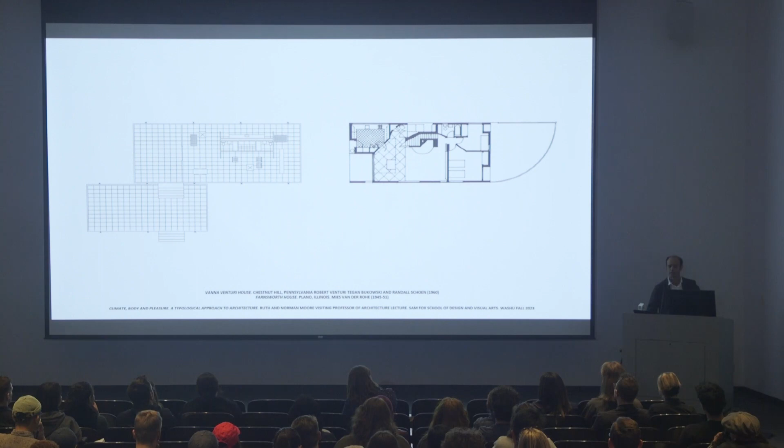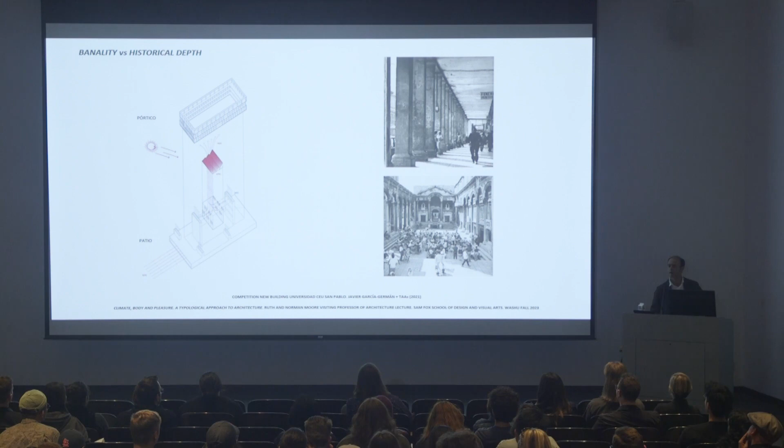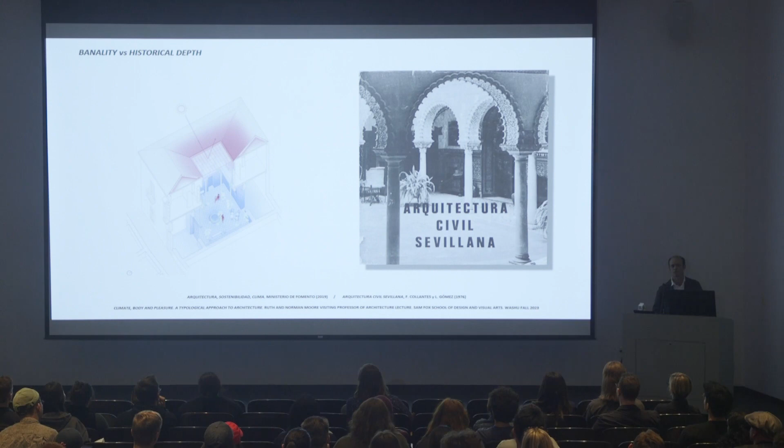This interest in generic models and archetypical forms has led me to the idea of typology. That is a kind of old idea. It has become a recurring reference in my work. Beyond the formal interest of the tendenza of Rossi, Krier, and Moneo, or the iconographic turn of Venturi, I'm interested in a renewed idea of typology, which complements its formal dimension with an interest in its performance, not only its climatic performance, but also the experience of the people who live within.

However, I think that unlike positions like that of Anna Heringer, who rely on traditional tectonics that can hardly face the challenges of the 21st century, or against the uncritical commitment to cross-laminated wood as if it were a kind of new concrete, I advocate for the recovery of both ancestral and modern building techniques, from rammed earth to prefab concrete, as long as they have local material supply and can be industrially systematized in order to decarbonize architecture.

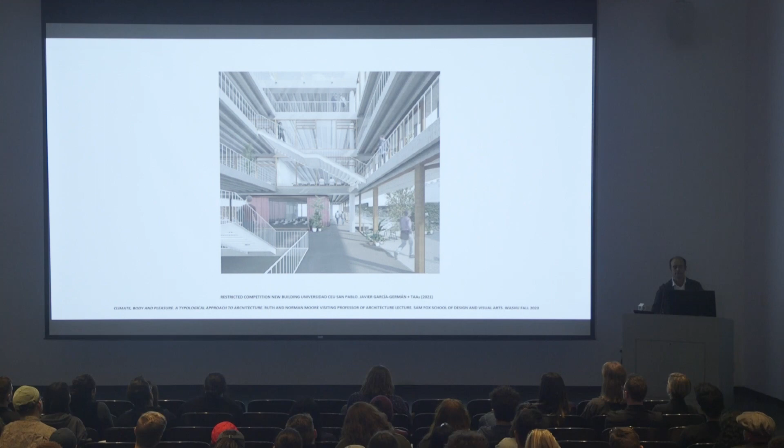Renouncing both activism and historicism, I'm interested in a revisionist attitude towards architecture with an inclination for materiality and experience. On the other hand, renouncing populist positions, I'm interested in a technocritical and cosmopolitan attitude with an inclination for the human body and its metabolism.

In the face of globalization and its tendency to make everything homogeneous, and as a reaction to regionalism that is kind of exploding the universal, I would like to think I advocate for what I call a generic specific, a position that is capable of articulating cosmopolitan dynamics with local contingencies, the universal with the singular.

Okay, let's go to part two. I will show several projects. I will try to show with these five projects how my position's architectural agenda has evolved in the last years. All of them are competitions. Some of them were successful, and we managed to build the projects. There's also a house I built several years ago. The selection might be better or worse, but I think it's the most pedagogical because I will try to show the evolution of interests I have pointed out in part one.

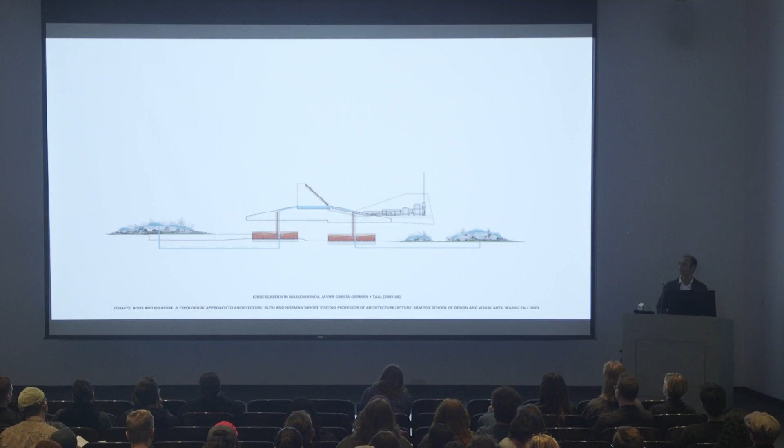And it also had this technical roof, which provided all the elements that the floor needed. Provided light, water, and energy, activating them for the use of the children, for the learning environment. The interior space was paved with sports flooring, kind of soft tiling, which was heated with radiant floors. You can also see in this picture how this roof provided the light to the interior spaces, generating this kind of interaction, common spaces between the rooms, the classrooms. It provided this soft and continuous warm environment where kids could crawl.

From the inside to the outside, the exterior floors included, around the building, a first ring of sandpits where the kids could play, and next, Jardin en Mouvement, inspired in the work of French gardener Gilles Clément, kind of gardening movement, which changed with the seasons, right, openly, freely, and where children could learn the passage of the seasons.

These floors, both interior and exterior, were activated from the roof, where the rainwater was collected to irrigate the garden, where the solar radiation was also accumulated to heat up the interior floor. On top of those skylights, we placed thermal panels, which heated up the water that went to the radiant system under the pavement.

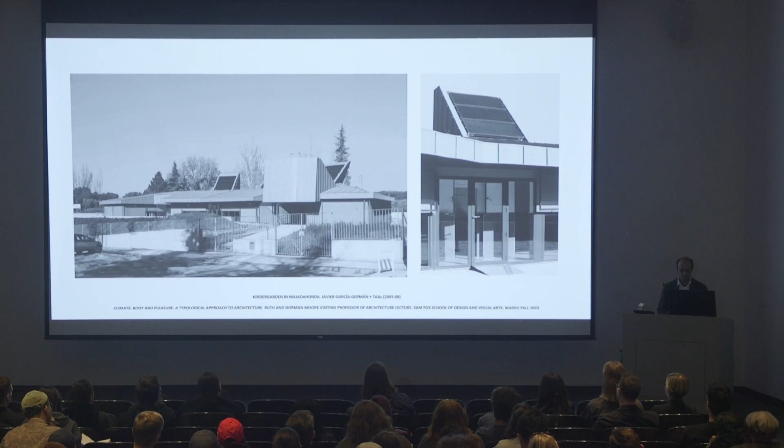In these beginnings, I think that climate was explored adding more or less technological devices, like the thermal panels in the skylights, but it is not a part of the spatial and material conceptualization of the school. This will only be approached in subsequent projects, and I will try to show you the changes. The building was wrapped in a net supporting an ivy creeper, which now covers the entire kindergarten, mediating between the building and the surrounding garden.

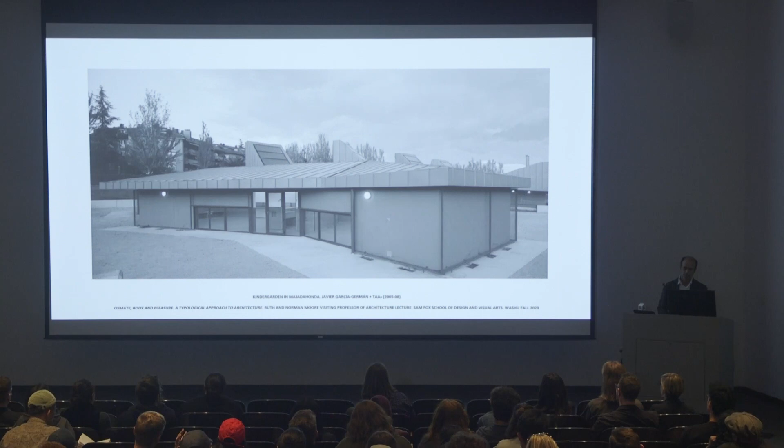This project was developed with a lot of precision, okay? And I will try to show you how it was achieved. Almost all the elements in the building were under control. We knew the climatic effect of all the elements that were introduced into the project. Of course, this project is connected to my doctoral dissertation I was preparing at that time, and also to the book Thermodynamic Interactions. The project starts from these facts, crude facts.

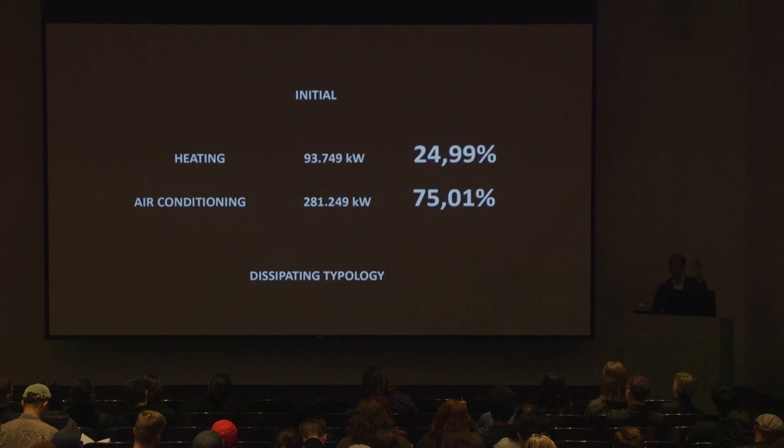In Madrid, any office building is a dissipative typology. And this means that it is continuously generating heat. I mean, Madrid does not have a climate as cold as Saint Louis has. And if you analyze its energy consumption, an office building in Madrid requires air conditioning throughout the year, except for the coolest winter months, when it needs a bit of heating. This implied that architectural strategies should go at least in two directions.

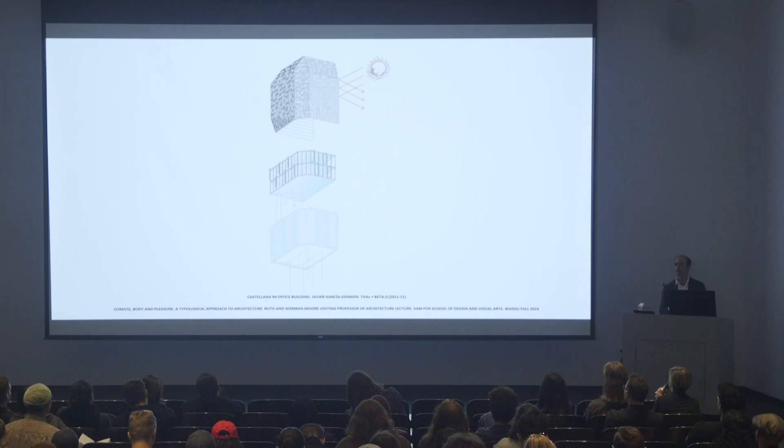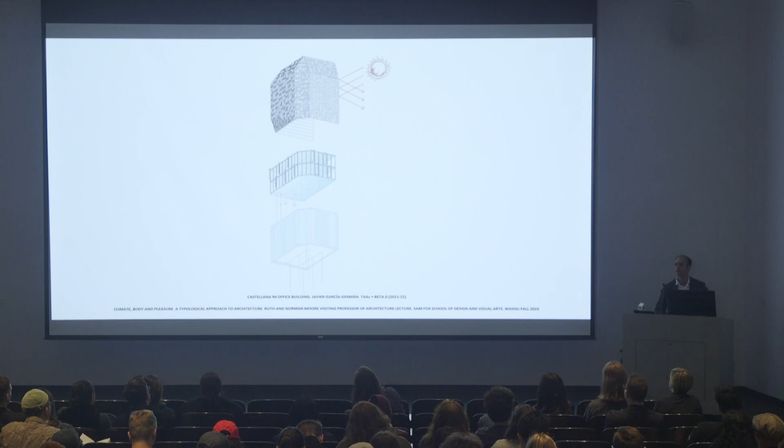On the one hand, the building should go down to capture the cool underground, the cool temperatures that are lying under the site. And on the other hand, the building should provide a solar shield. One of the requisites of the developers was to have a glass building, okay? So we needed to have a really good protective shield for the sun. For the first strategy, very radical steps were taken.

Ducts were embedded in the 2-meter thick foundation slab the building has, almost 20 meters below the ground, and in the 40-meter deep diaphragm retention walls around the parking, which together with 15 geothermal wells, which run 300 meters deep, capture the underground cool temperature below the site. These low temperatures are then pumped back to the building, to the slabs, where a radiant system embedded in the concrete slabs cools down the users inside the building.

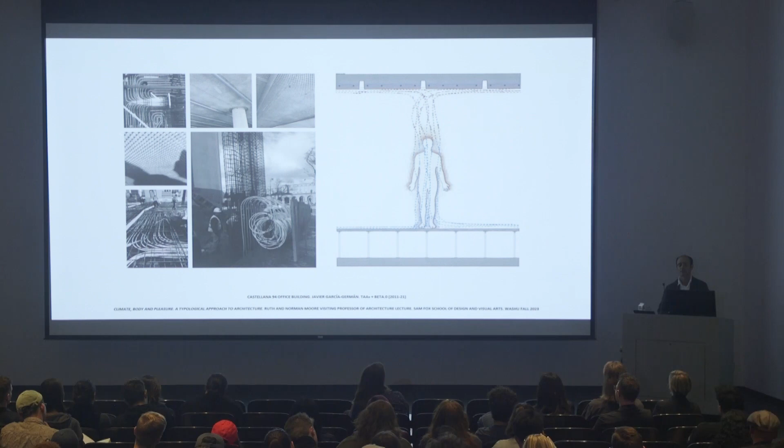The result is a commercial office building without false ceilings. Flexibility is provided by a raised floor. In this building, the structural and climatic dimensions are integrated into, I would say, a convergent strategy that is conflating the structure and climatic questions. The corrugation of the slab you see in the picture aims to maximize the radiant heat exchanges between the building and its users.

It is important to point out that the building energy saving strategy takes on board how the body works. You know that the body is a heat machine that is exchanging almost 50% of the heat it gives off through radiation. It, however, exchanges only 25% through convection, which is the heat transfer mode air conditioning uses. Cooling with radiant slabs, compared to the typical air conditioning system used in office buildings, results in incredible energy savings, since the human body is much more efficient at exchanging heat through radiation than by convection.

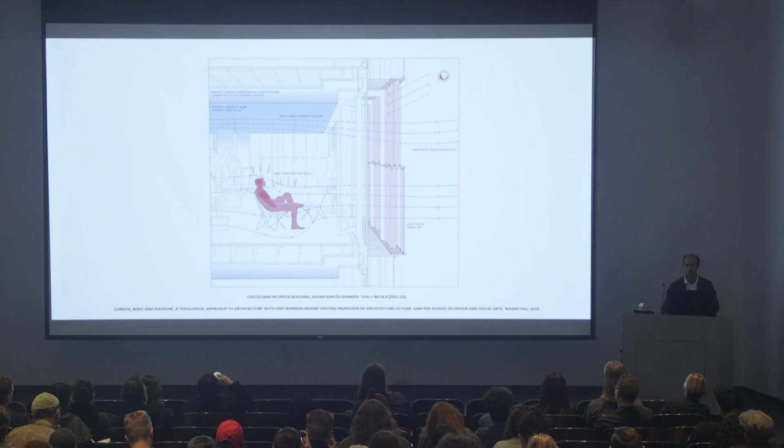So looking at the human body, we managed to reduce substantially their energy budget to the point of not having any air conditioning. And Madrid in summertime can be really hot. The second strategy was to design an effective solar protection shield. First, this has to do with the building's massing. Urban regulations imposed a step volume for the office. It's the step volume you can see under the glass envelope.

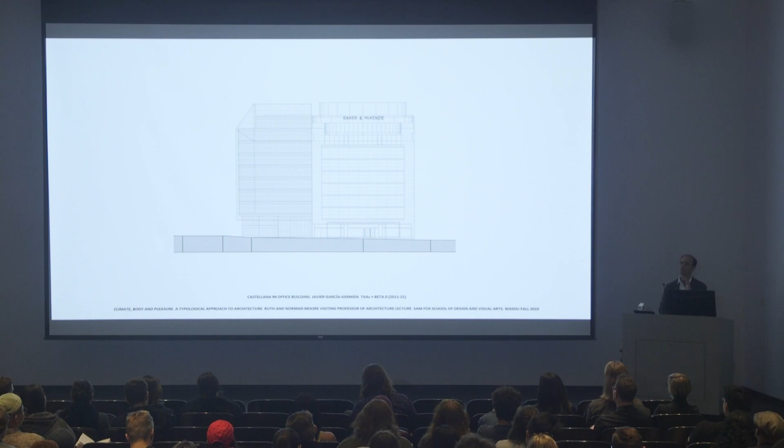This volume, wrapped with a faceted skin, increased the capacity of the building envelope, and we managed, through the shape of the envelope, to reduce the impinging solar radiation by about 10%. So through the geometry of the envelope, we managed to tackle again energy questions, addressing energy problems through architecture. The geometry was also complemented by a material strategy.

This faceted skin was built in a reflective glass, which through the arrangement of the different pieces and the thermodynamic properties of each of the glass tiles, protected the building from the sun in a very effective way. This material strategy was designed with parametric precision, since the position and the performance of each of the pieces of glass placed in the building was controlled through a complex Grasshopper script.

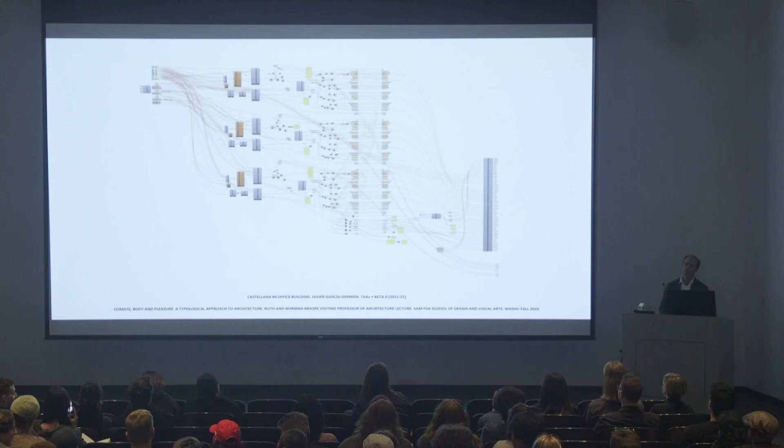And this tool, apart from providing precise quantitative data on solar protection or the energy we were saving, enabled us to interact with its boundary conditions, mediating between many parameters that were in the site, from the solar questions to the wind, to the shadow cast by surrounding buildings.

Since building solutions required systematizing to ease fabrication and assembly processes, we designed 8 different modules with particular technical and aesthetic properties, and the parametric model was very useful to arrange these 8 modules, indicating the most convenient position across the envelope. So we had some modules that were more permeable to enable natural ventilation, other modules that had more reflective qualities, which were positioned in the west facade, etc.

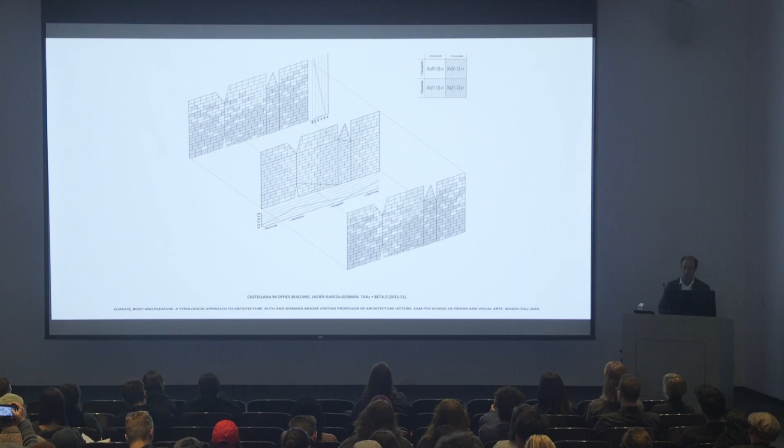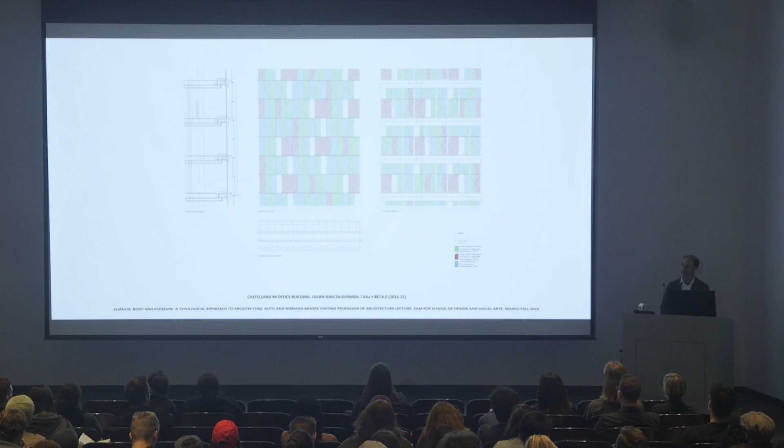It enabled us to select particular types of glasses too, the kind of glasses with the thermodynamic properties most indicated for each position. We had 4 different kinds of glasses. And also to decide the best angle in which the glass tiles were to be placed. This same logic was applied throughout the envelope, wrapping the whole building with the same skin.

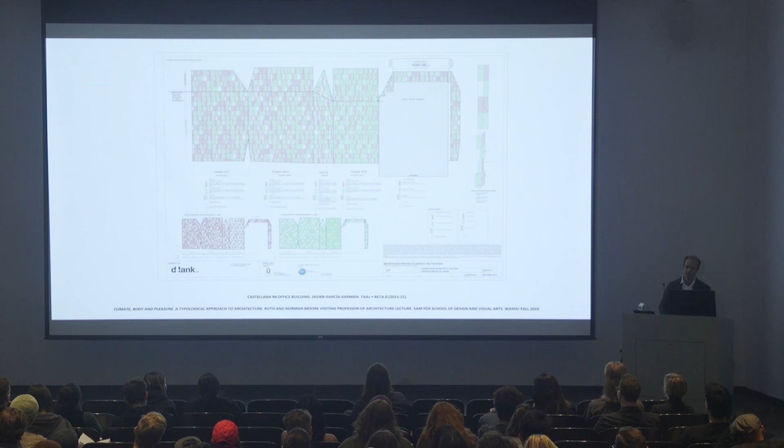Apart from this kind of energy-saving architectural process, we were also interested in the aesthetic dimension. And we looked at artists like Olafur Eliasson or the French Arnaud Lapierre. We thought that this glass skin also required a perceptual dimension. Faced with the solid materiality of the brick and stone buildings in Madrid, we thought that installations like this one seemed appropriate, dematerializing the physicality of the building, diluting its presence amidst the reflections of a cloudy sky.

We thought it was a kind of interesting strategy. Madrid is well known for the beauty of its skies. We intuited that the materiality offered by this installation would be appropriate to reflect the dynamic chromatism of Madrid's changing skies, proposing a more sensorial approach that we found could somehow balance the overly technical approach we had unfolded for the rest of the building. The skin reflects the Madrid skies in a variety of ways, depending not only on the time of the day, from sunrise to dusk, but also on the meteorology, on cloud arrangement, cloud density.

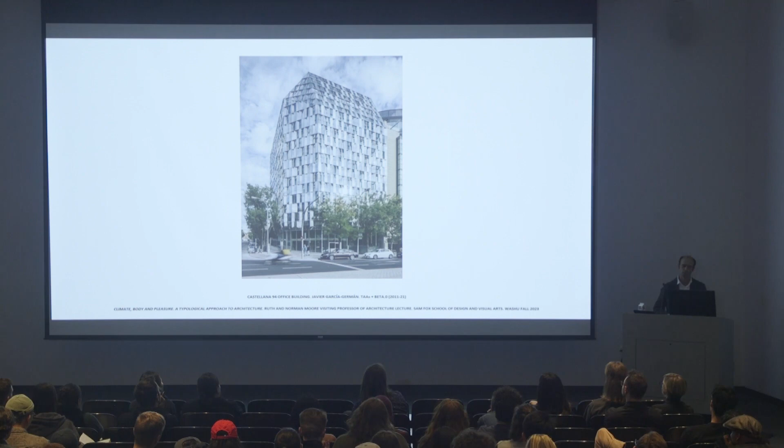The reflective skin captures the sky of Madrid, diluting it in hundreds of flashes and reflections, which are introduced to pedestrians walking along the streets. At the scale of the whole building, this faceted prism, I think, is also amplifying this effect, forming a great kaleidoscope which dematerializes the building, reflecting the beauty of the changing skies.

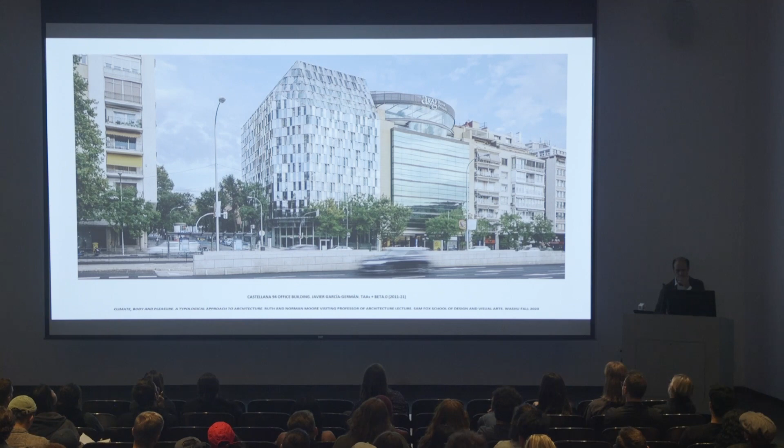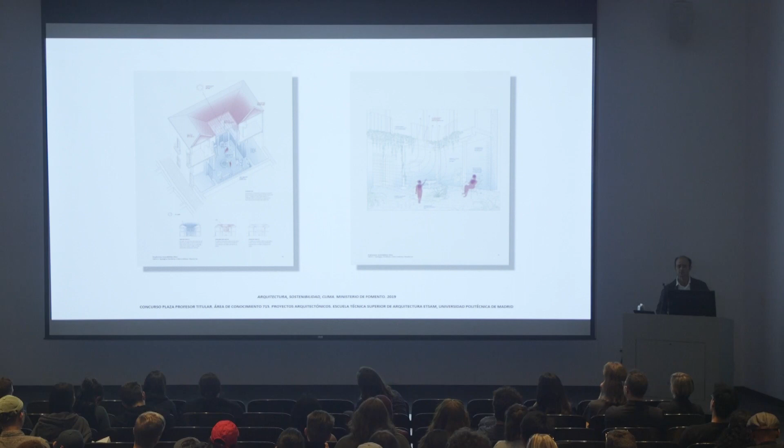Okay, let's go to the last 2 projects, which shift this quantitative approach I have shown you in the office building to a qualitative and experiential one. These 2 projects are related to the study of climatic types I have been developing in the last years. This has run in parallel to other research endeavors, principally an exploration on Spanish climatic typologies, which has been financed by the central government to find in vernacular and ordinary Spanish architecture an alternative to the more quantitatively driven energy regulations.

The first project is a single-family summer house in El Escorial, which is a town close to Madrid in the mountains. Unlike the previous project, which started with crude thermodynamic facts, this one began its design with a documentalist approach, which explored a variety of questions which range from the site's climatic conditions to the local material culture, to a set of historical references I thought were appropriate for the commission, the experience and lifestyles of the inhabitants too.

Numerous climatic types were studied, among which I would like to highlight this American wooden house with this green roof, which is included in Sybil Moholy-Nagy's book, Native Genius in Anonymous Architecture, and which my WashU students know quite well. And an interesting Russian wooden cabin, the izba, which combines the insulation of wood to the outside, as the American log cabin, with the thermal mass of that huge stone fireplace in the inside. This massive fireplace is lit in the early morning, and as the day progresses, stores heat throughout the day to progressively release it along the night to warm the inhabitants of the cabin who sleep on top of the fireplace.

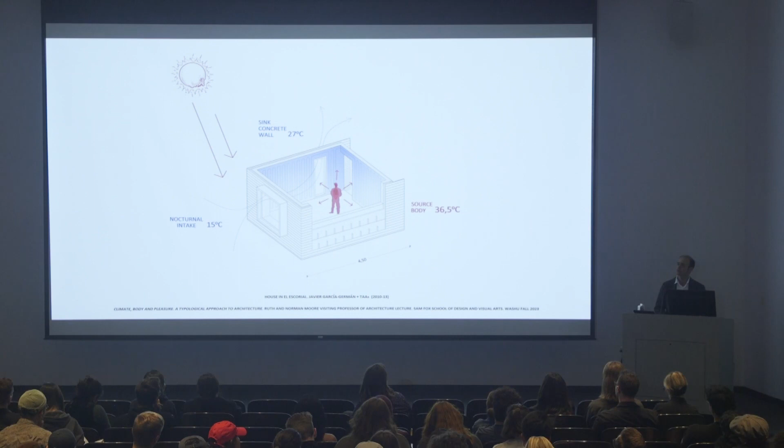The project starts by designing a typical room. It is kind of the elemental, spatial, and climatic unit of the house. And it has the capacity to articulate the main objectives of the project. It has a big window to enjoy views. The project is located in a beautiful forest. In addition, each room has an opposite window to enable cross-ventilation to cool down its interior in summertime. Like the Russian izba, the interior of the room has thermal inertia, as it is built in exposed concrete, so that it can cool down in summer and in winter. And externally, it has been insulated with projected cork and clad in wood to add an extra layer of insulation.

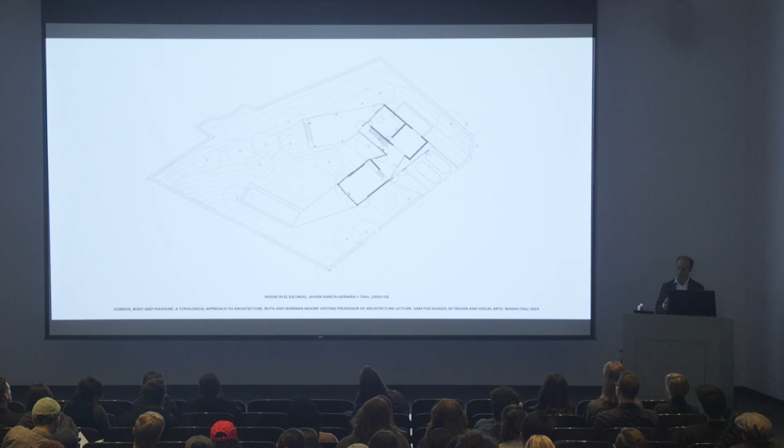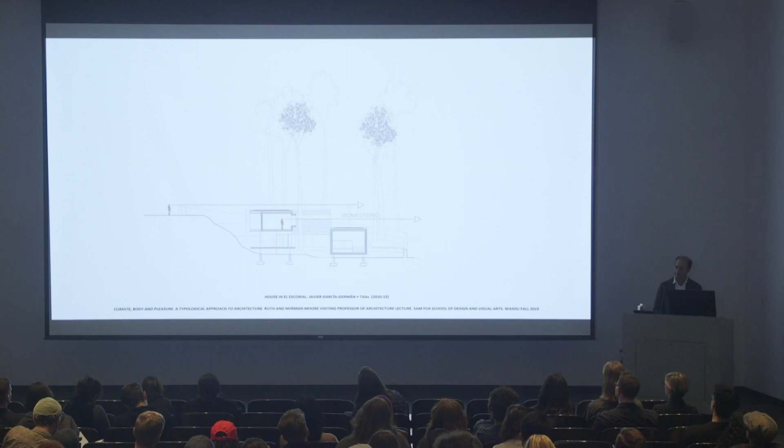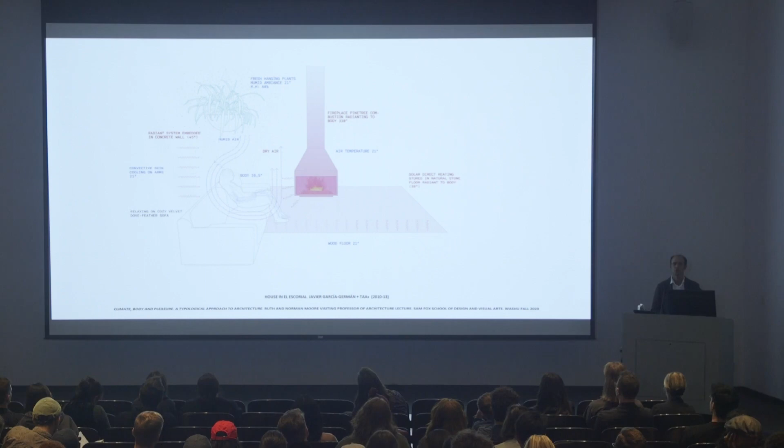On the ground floor, the shared spaces are connected to the garden, so the typical room is transformed to open to outdoor space. In section, the rooms are raised to look over the lower floor, generating a shaded porch that is connected to the garden. The interior of the house was designed to meet the wishes and also the beliefs and the ways of life of the owners, ensuring that the architectural and environmental conditions were well articulated. The interior finishes were defined according to their climatic performance. For example, terrazzo tiles were located close to the fireplace and to the south-oriented bay window for heat storage, whilst wood was used in the rest of the room.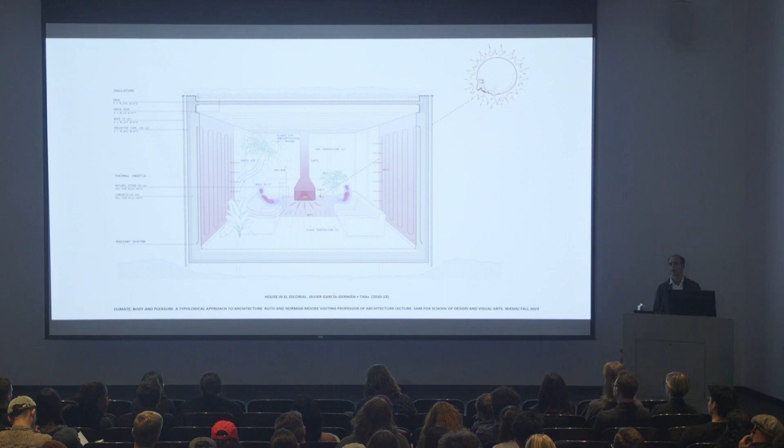And from this post-occupancy drawing, full circle, we go to the interior of the house, testing that the collection of rooms mediates between interior and exterior, between outdoor climate and indoor atmosphere to provide a well-calibrated environment. On the ground floor, the domesticity and coziness of the upper rooms dissolves to open interior space and integrate indoors with the garden.

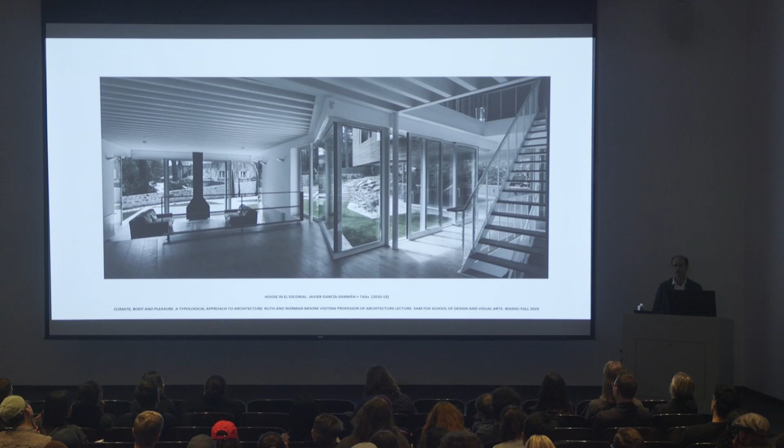The house is located in this beautiful forest with these fantastic views. Note how the rooms rise following the slope of the mountain to maximize views and to create this shaded outdoor space.

The house, similarly to Moholy-Nagy's log cabin, is covered with a green roof that has over the years grown with plants, providing this extra insulation. Cork and wood are giving to the elevations, but also integrating the house into the woods and the surrounding environment.

Okay, so we are getting closer to the end, and to finish, I would like to explain the last project, a public housing scheme we have recently completed in Madrid. Being a much larger project than the El Escorial house, however, it has been designed with the same design protocols.

It is a conventional building with simple, straightforward, ordinary architecture. It is built with prefab concrete panels, which gives it a roughness and dryness that is typical of social housing buildings. The durability of the building underpins the selection of these concrete panels as the principal building material.

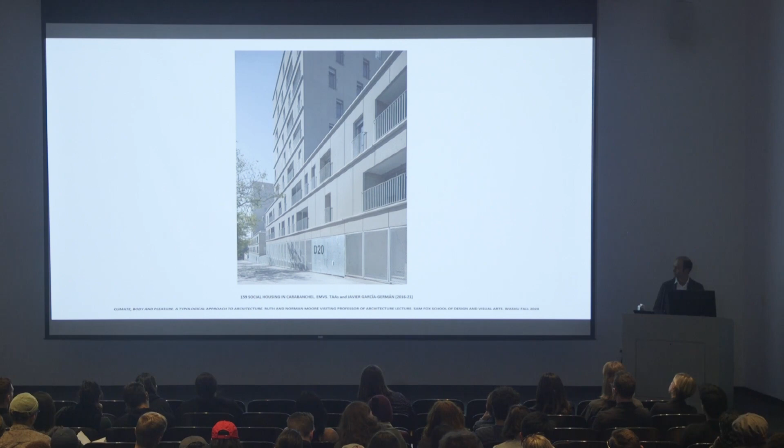These panels have this built-in fascia that is kind of marking each of the floors, but by flying slightly over the facade, as I learned from the Smithsons' Economist building in London, prevents water runoff, addressing the weathering and maintenance of the building.

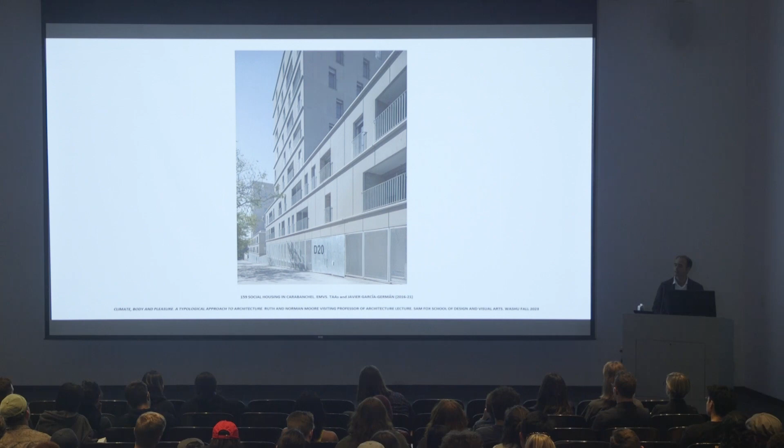These panels, which are up to 8.5 meters long, ease a lot the construction process, enabling a fast assembly line. In addition, the panels have been bolted to the slabs, which will facilitate future disassembly procedures.

Its stark and utilitarian aesthetics hides a network of interior public spaces which are passively tempered, being warmed up by the sun in winter and cooled down by summer winds, catching a smooth breeze that blows in Madrid in the early morning from the northwest from 6 a.m. to 9 a.m., and that has the capacity to make Madrid a city without air conditioning, which is something amazing.

This solution is achieved through a design process which, unlike the office building, combines technical and cultural drivers. First of all, we look for everyday life situations which are climatically and socially successful. This image shows a typical situation in Madrid, going out for night cooling, or as we commonly say, salir a tomar la fresca. We look for situations which evidence successful climatic, urban, and architectural interactions.

We also look for references in historical and contemporary architecture, like this traditional house in Cairo, studied by Hassan Fathy, or the Austrian pavilion at the Milano Expo. With these examples, we try to search for the architectural strategies which will provide the success of these situations.

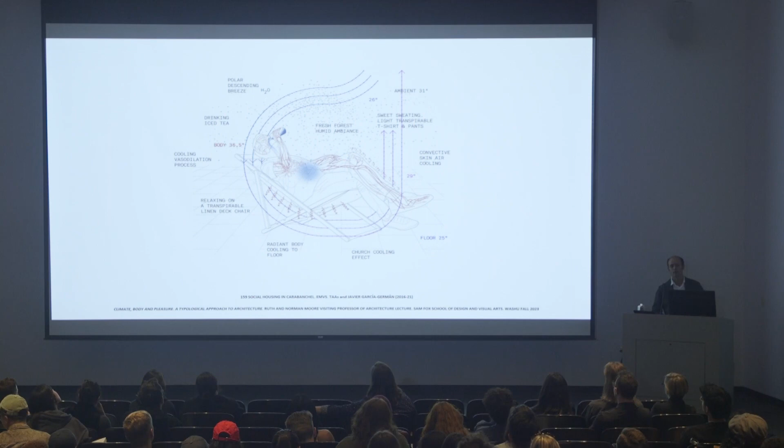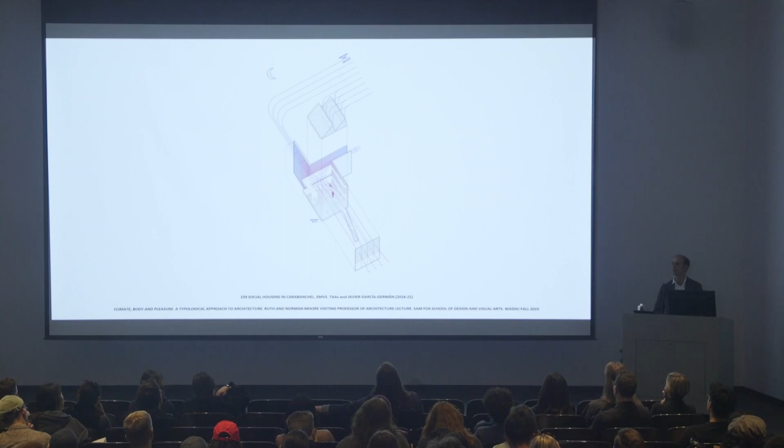And we also try to understand the connection between the human body, physiological needs, and architecture, trying to explore the potential of particular spatial and material arrangements to achieve those situations.

During the design phase, we carry out, of course, rigorous climatic digital simulations. These ones have been undertaken by Atmos Lab, which is a climatic consultancy firm located in London, which are necessary to verify that the design climatic situations work correctly.

The project also started with a typological approach, similarly to the one I used in the previous project. We began designing a typical housing unit. It has a room-based layout without corridors and with two differential elements. First, an entry hall, which has been oversized, adding the built area of the corridors, and has become an extra room, which is located over there.

And a generous terrace, which is 1.8 meters wide, which is an outdoor room, and which, similarly to the hall, provides an outdoor connection to all the rooms in the unit. Following the Lacaton & Vassal greenhouses, which I much admire, this outdoor space can be closed in winter with a transparent membrane to warm up the apartment.

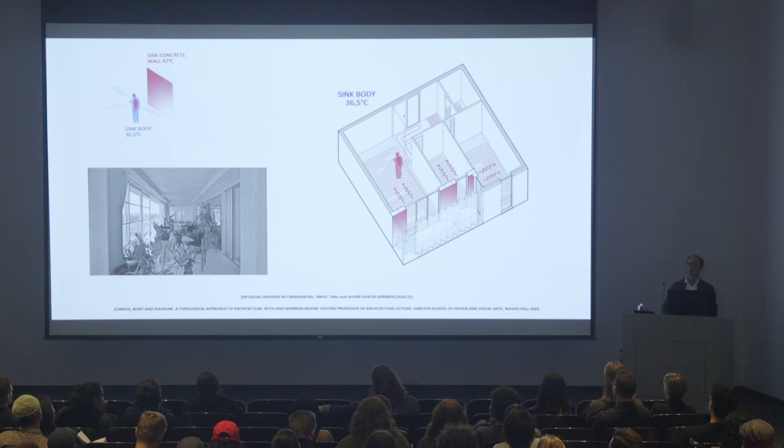Note in this drawing that the wall between the terrace and the interior has no thermal insulation, so that the stored heat can be driven indoors. In summer, removing the membrane, the terrace becomes an outdoor shaded space, which works as a kind of climatic threshold, very similar to those typical of Mediterranean architecture.

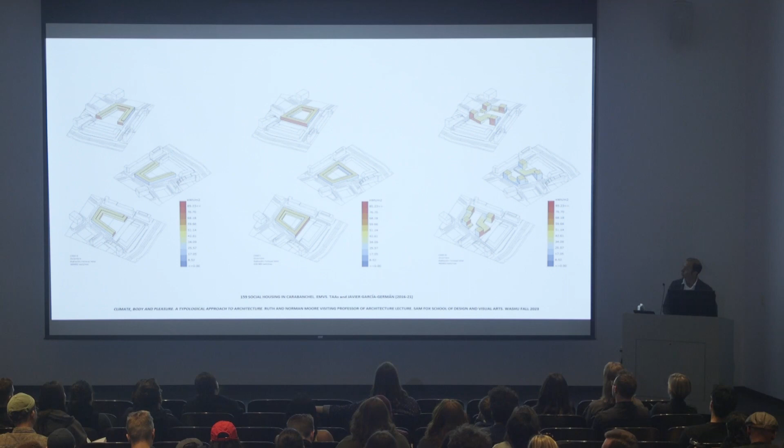Once the housing unit was defined, we moved on to design the external form, the massing of the building. And we tried many different configurations until we found the one which best performed both in summer and in winter time, which is the one here. I mean, we tried many different urban typologies, from the most conventional blocks, like the ones you see on the left, to more particular arrangements.

The developer required to have a double-loaded corridor to reduce the building costs, which generated a really compact building, but that had the problem that it didn't have any natural ventilation. The final scheme is organized in these two zigzagging three-story blocks, which form the base that articulates these three outdoor patios and which connect the building to the urban context.

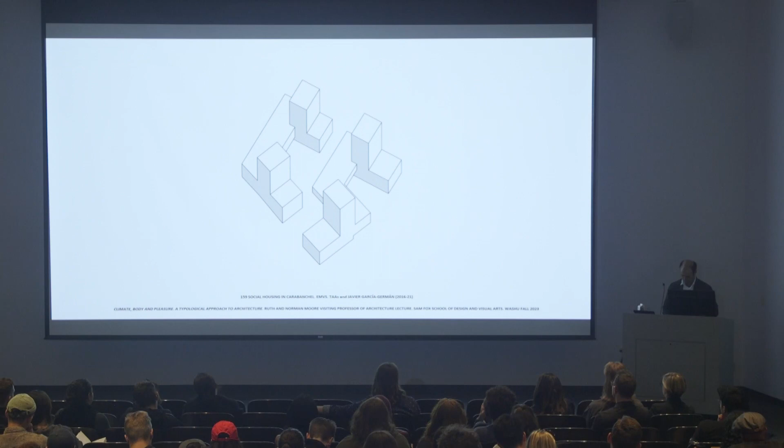Over this base are located four 8-story towers, which were placed with care not to obstruct the solar radiation that was coming into outdoor spaces. To compensate its compactness, the building has been designed to catch these cool breezes I referred to at the beginning. For this purpose, a network of wind catchers captures the cool nocturnal northeast winds and conducts them through the interior network of public spaces to cool down the interior of the building.

The indoor material palette is formed by these kinds of high thermal inertia materials, such as exposed concrete block or terrazzo tiles, which have the ability to store heat effectively. The placement of the wind catchers was not arbitrary. The aerodynamic behavior of the building was simulated until the right location was found for each of the wind catchers.

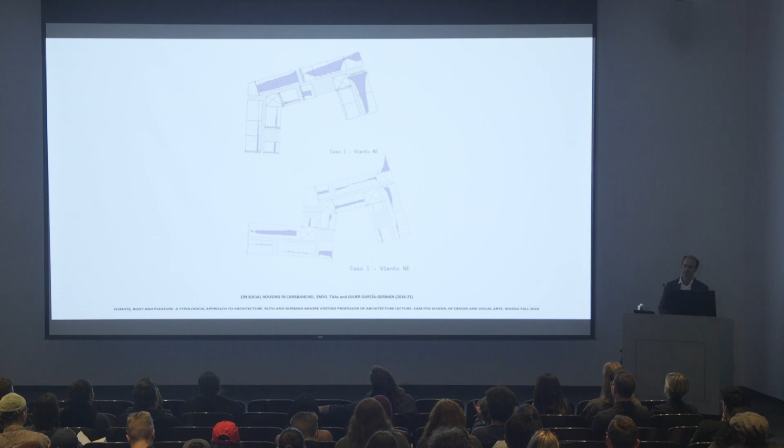The final arrangement guaranteed a minimum amount of pressure throughout the interior corridors, being able, despite the fact that, as I mentioned, the building is quite wide, it's a double-loaded corridor, to naturally ventilate each of the housing units. That's why it was so important to locate correctly the wind catchers, the number of wind catchers and the location of the wind catchers, so that we could have the right amount of pressure inside the corridors.

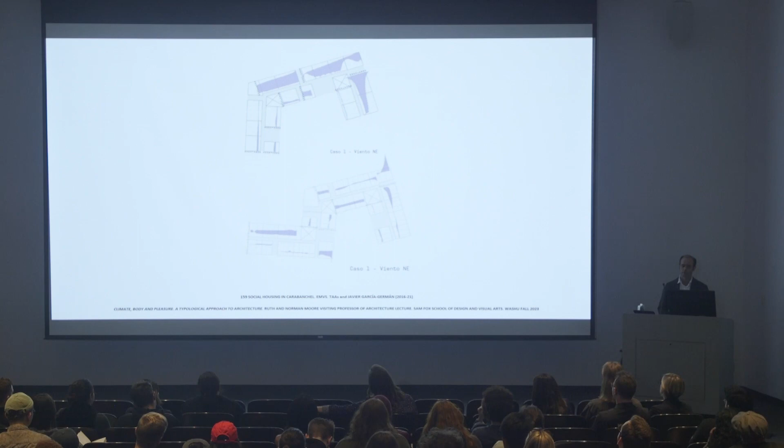The building has these kinds of ordinary windows and terraces. They are inspired by the typical openings of the Madrid 19th and early 20th century Ensanche buildings. Their verticality enables a more effective control of the climate, of incoming solar radiation, providing at the same time a more direct visual connection between the interior and the exterior, promoting social interaction.

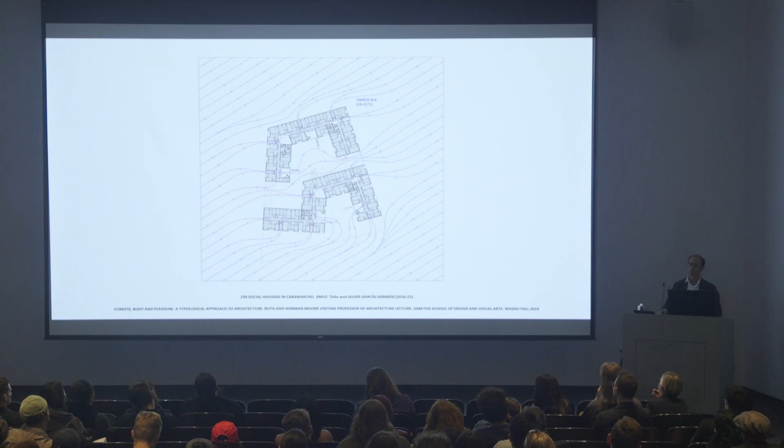And going back to the layout, we can see the path that the cool air takes, entering the building from the northeast side through those openings, going through the corridors, cooling the interior public spaces until it reaches the leeward outlets, where the air comes out again to the exterior.

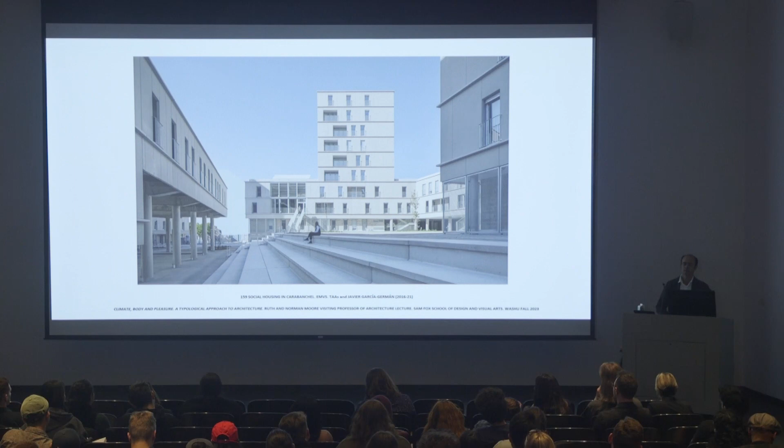In this network of interior public spaces, the four social condensers the building has are the real protagonists. They play an important role in the ventilation patterns. They manage to induce a pleasant atmosphere, which makes them instrumental spaces in the social life of the building. In addition, they are located at the intersection of corridors, elevators, and staircase wells, assuring their vitality and social performance.

Each of the 159 housing units complies with European Union energy regulations. Despite the fact the building layout enables its natural ventilation, they are mechanically tempered to comply with the demanding European regulations. However, this network of public spaces is passively tempered.

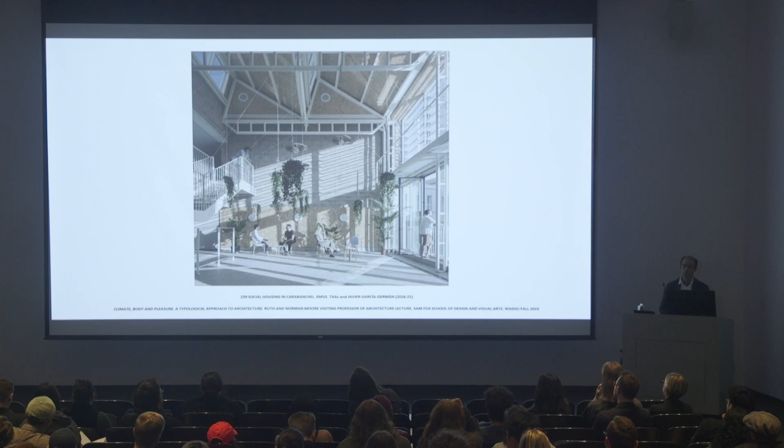When outdoor temperatures drop below 21 degrees Celsius, the wind catchers and social condensers' louvers open automatically, letting the breeze enter the building to cool down the walls and floors. The high thermal inertia of the concrete, masonry, and the terrazzo floor tiles, combined with the airflow, which is controlled by these louvers, guarantees that the space is cooled down in summer.

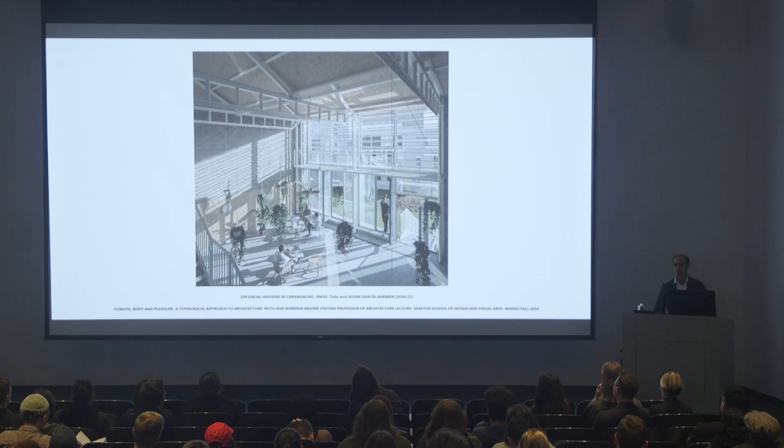These hanging plants also contribute through evapotranspiration to make the dry Madrid climate more pleasant. These plants are also equipped with water nozzles, which contribute to cool down the space further through evaporation. With this combination of traditional and industrial building systems, architecture, climate, and daily life, I would say, go hand in hand, delivering these pleasant atmospheres that are at the base of the lively and vital communal life that the building has.

And to finish the lecture, I would like to make a very brief concluding remark. Over the last years, we have worked to avoid that the debate on sustainability ends up becoming a technical discussion on energy savings, but rather an architectural form of knowledge, mediating between technique and culture and taking on board disciplinary tools, but also the lessons from history.

I think that we need, as architects, to design environmentally sensible buildings which engage in architectural debates. It's very important for me to engage in architectural debates, to provide not only healthier and more comfortable environments, but also an intense and stimulating atmosphere for their inhabitants.

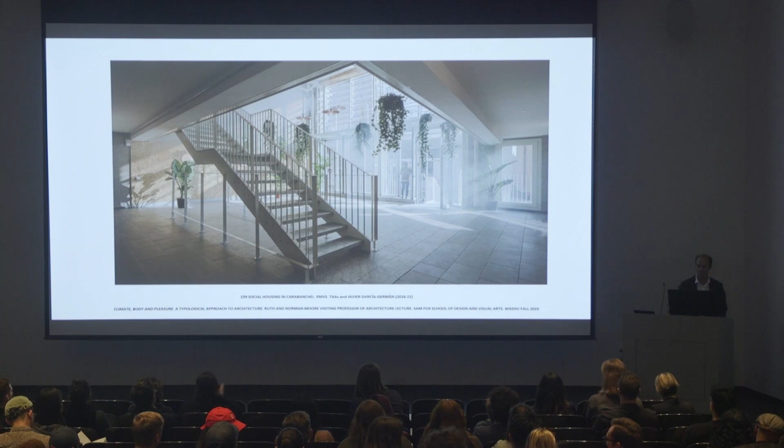Thank you. Okay. Okay, I don't know if there are any questions before you leave. Sure, I'll go ahead now. Do you want the micro?

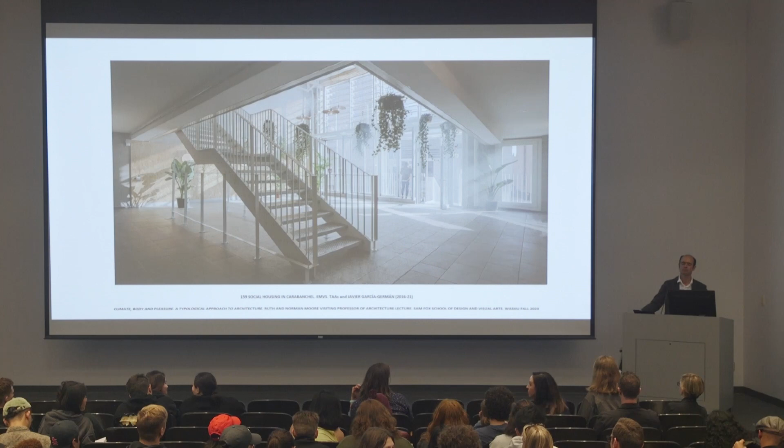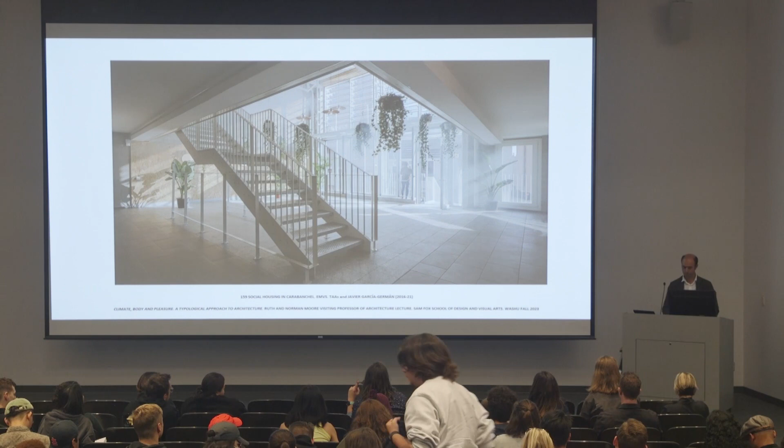I'll just be loud. Yeah, as architects, we're charged with predicting the future. That's a really difficult thing. And what I mean by that is, when we're designing, we're trying to predict how the buildings will perform. Right? And we have technology that allows us to understand it more clearly. And I appreciate all your graphics that help to explain things that are otherwise invisible, and invisible to many of the inhabitants. These graphics are extremely helpful in explaining to us.

And so you're using the technology that helps you to predict. Do you have feedback yet, because a lot of these projects are still fairly new, into how it's performing compared to how you were predicting? We have not been lucky enough to be able to monitor any of the buildings we have designed. We are currently applying for money to do this in this last building, and I hope to be able to know if things are working as we predicted, right?

It is also problematic because you know that simulations are not always correct, right? And digital tools for the time being are helping a lot, but it is true that they have many flaws and many problems. And what I found after years working with different softwares is that the most important thing is, as an architect, to have a clear idea of how heat is moving, the very basic physical processes that are occurring. And that can be done without the aid of digital tools, okay?

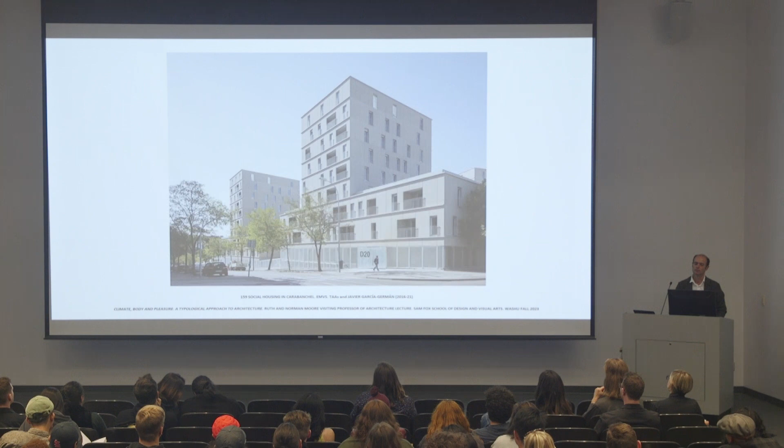This hallway has a double door. One part is a window and the other one is a door, so it can be opened. And the pressure builds in the corridor with a specific wind speed so as to be able to ventilate.

It is true that not all the units can be ventilated. Of course, the ones in the towers have two facades, so they ventilate pretty well. And the ones in the slab, we reach, I think, around 90% of natural ventilation, and we have a 10% that could not be ventilated. It was very difficult to attain.

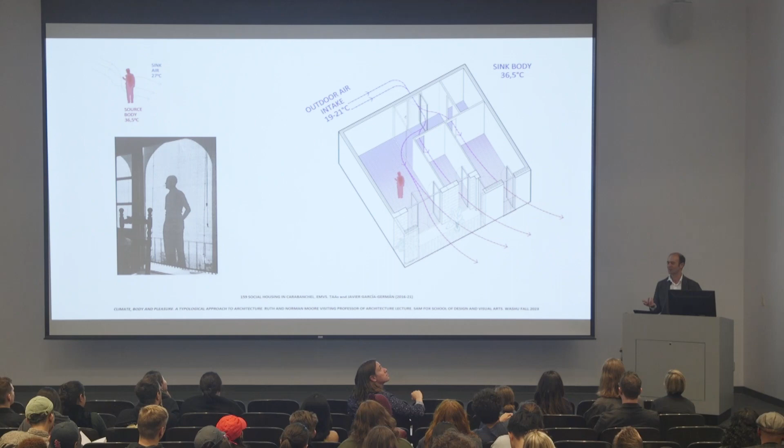Anyhow, the developer locked those windows, because they are a public developer, and they have to comply with energy regulations. So, we designed it this way, and we knew this was going to happen, but we thought it was necessary to provide it. Maybe in the future, energy regulations change and switch to a more passive mode, and the building will have the potential to ventilate naturally the houses.